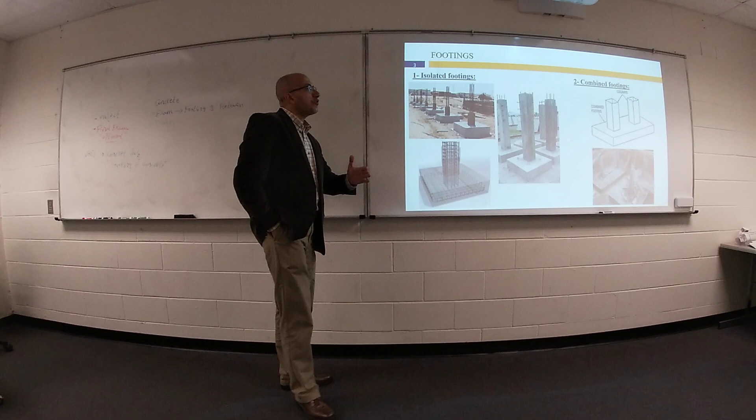We have different shapes of foundation. Maybe every column has a footing, so we can call it isolated footing. Your reinforcement is just mesh in 2 dimensions, X and Y, just one layer of reinforcement. So the first type of your foundation is called isolated footing. Each column has its own footing.

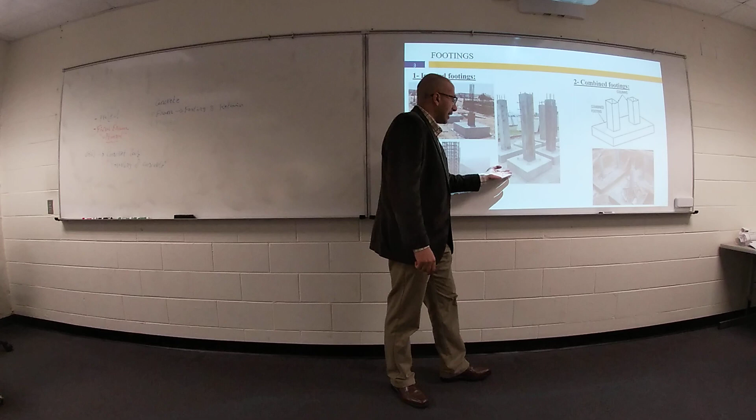As you see here, this footing, we need to know a few things. What is the dimension of your footing? Looks like a rectangular shape. What is the total depth of your footing? How much is the reinforcement at the bottom in this direction and this direction? If you would like to design your isolated footing, I need answers for all these questions: width and length, total thickness, and how much reinforcement at the bottom in both directions.

One student will ask me, what about your column? We did our design of column already. Just a quick hint: in the concrete exam, at the beginning, do you remember what announcement I made? I told you there is no torsion in the exam. That happened? Yeah, I have many answers about torsion.

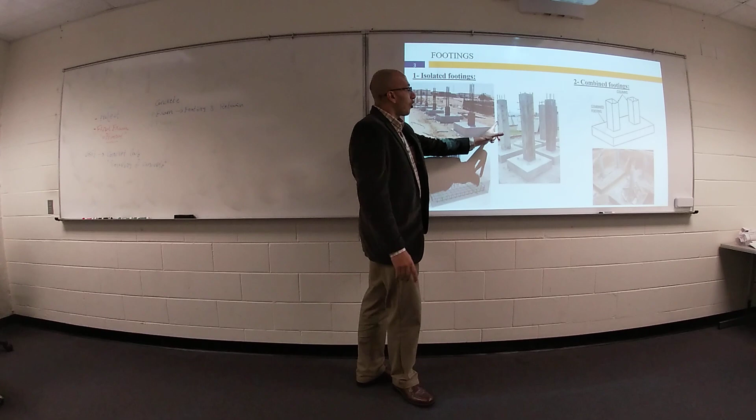So when we start to design isolated footing, we will answer all of these questions. Okay, I have 2 columns in your building, and I design isolated footing for this one and isolated footing for the other one, and I found something not good. This column and the other column, I'm talking about plan view. So this footing for this column, and the other footing for the other column, we have overlap between the two footings.

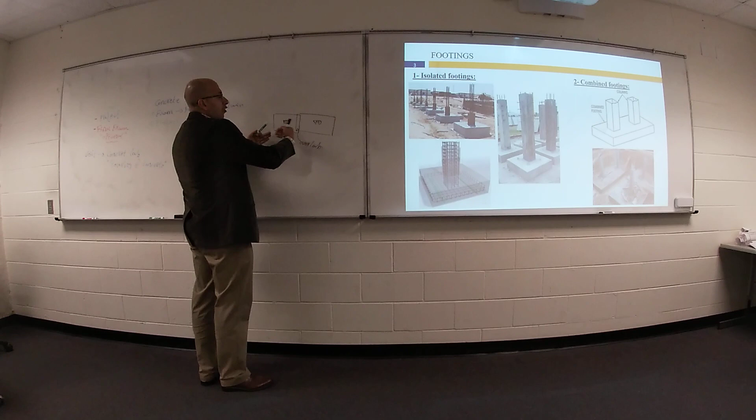So the other option, or second option, is something called combined footing. These 2 columns are very close to each other. For some reason, I placed 2 columns very close to each other. I designed first an isolated footing for this one and an isolated footing for this one. I found your footings overlapped. So I will cancel my first option and start to design something called combined footing.

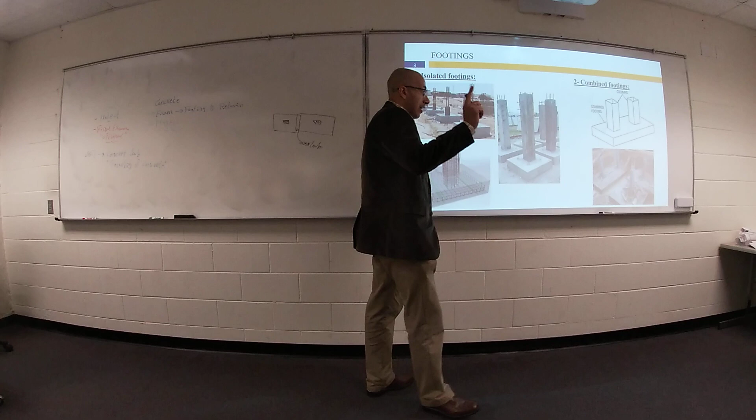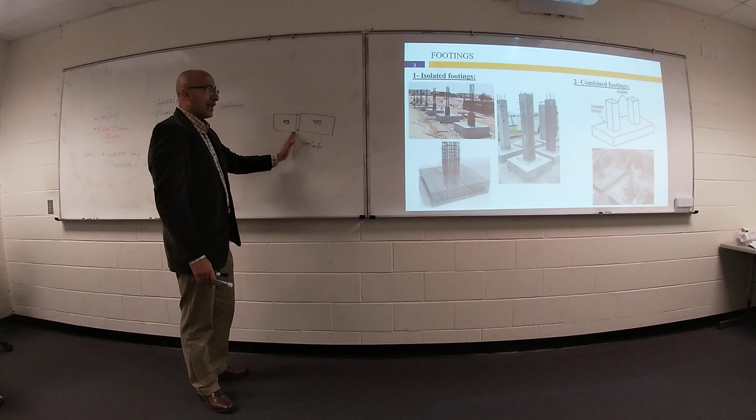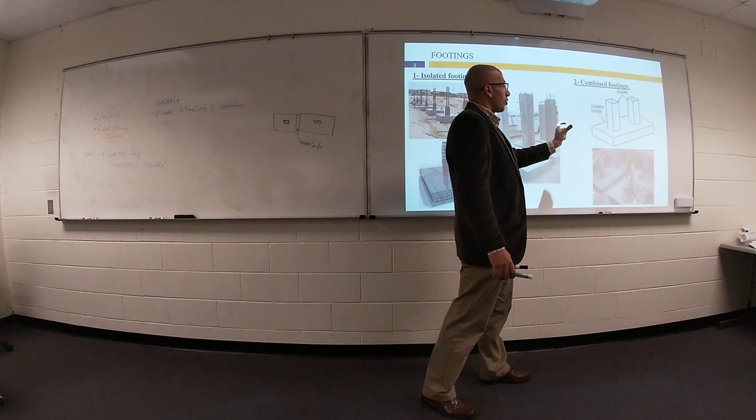Combined footing looks something like this. Only one footing supporting your 2 columns. So we have 2 columns supported by this footing. But remember, I cannot decide to use combined footing until you try isolated footing first for each column. If you have overlap in between, then I decide to use combined footing. Any questions so far? This one is more complicated because you have to try isolated first and then take a decision for combined.

Third type of footing is called strip footing. If you have a wall, and only one concentrated load or one column, yes, I can construct one footing like this. But if you have a continuous wall, I cannot construct only one footing, another footing, another footing - no, your footing will be a strip footing, something like this. If you have a concrete wall, a brick wall, any type of wall, fence, you can construct strip footing underneath your wall.

The fourth type of footing is called strap footing. But I forgot something. If you have an isolated footing, here is your elevation, and here is your plan. You have to put something in your mind: the centroid of your column - I will not say must, but should be - the centroid of the footing. So the centroid of your column will be the same as the centroid of the footing.

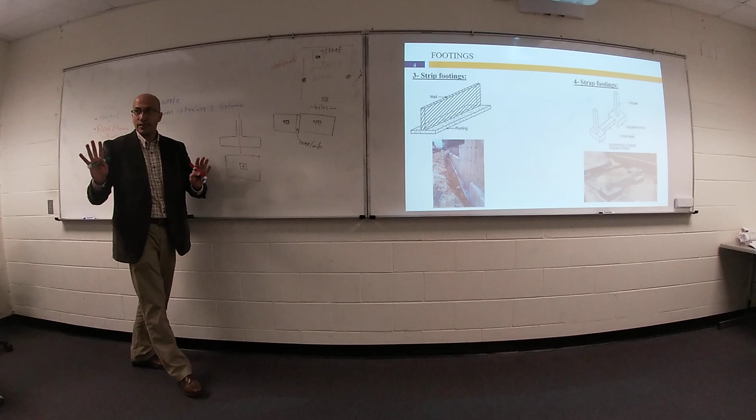But I cannot put anything at my neighbor's property. So how can I put my footing here? The only option is to put your footing like this. I cannot put anything over the ground or underground at my neighbor's property. That's right? What do you think? What is the difference?

Okay, let's see the elevation for this shape. You have your column and you have your footing, something like this. Your column has a concentrated load P ultimate. Do you think this load will make something happen to this footing? What do you expect? Overturning. Like this chair - if you stand at the centroid of this chair, nothing will happen. But if you stand at the edge, overturning.

We have another column inside your boundary with regular footing. So I will connect between this footing and this footing with a beam. This beam is called strap.

So I will connect this footing with another footing and another column inside your property. If this column would like to overturn this footing, this strap will connect between this one and this one. This is the idea for strap footing.

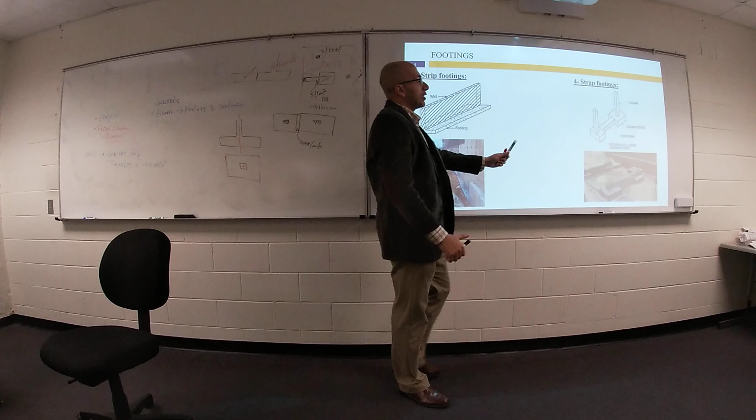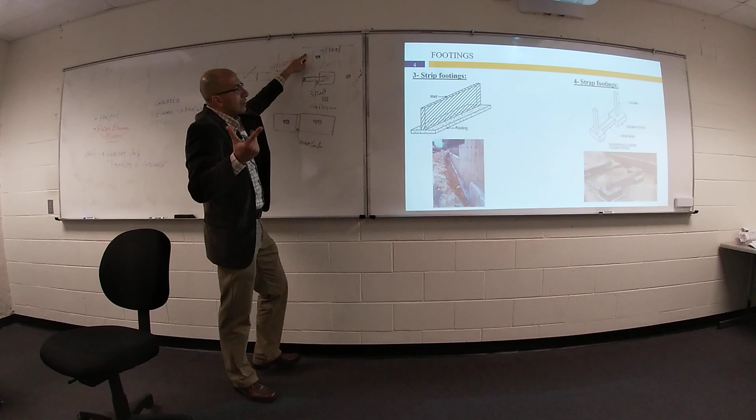Like this, for some reason, maybe this one will be also on the street. Maybe you don't have a choice to put your footing in the street, no way, so I will put my footing at the edge, like this. So I have to connect between this footing and another footing with something called a strap.

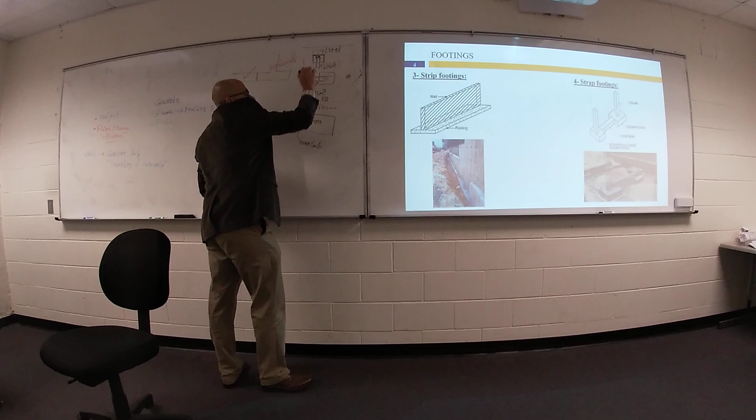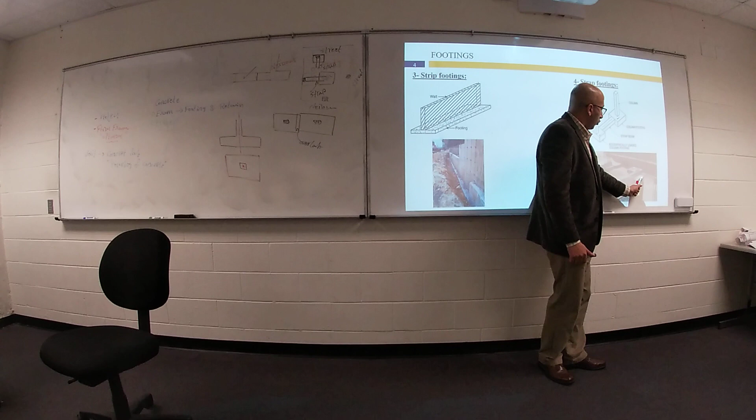So if you don't have the option to put your column at the centroid of the footing, and you have to put your column at the edge of your footing, we have to connect this footing and this footing by something called a strap. So this is the shape of your strap. This column, this footing, the column at the centroid. But this footing, your column at the edge of the footing, so we connect between this footing and this footing by strap.

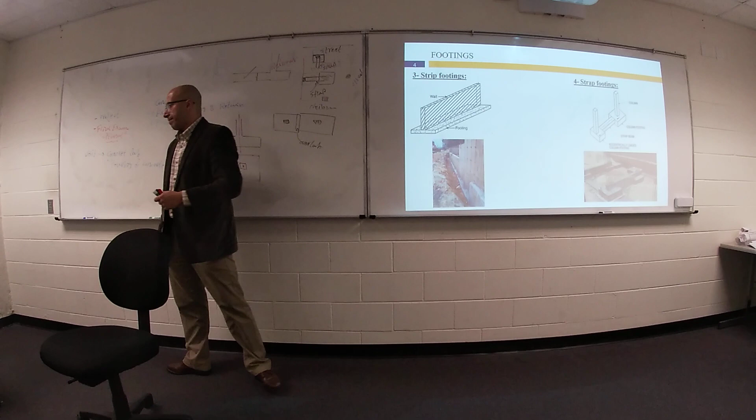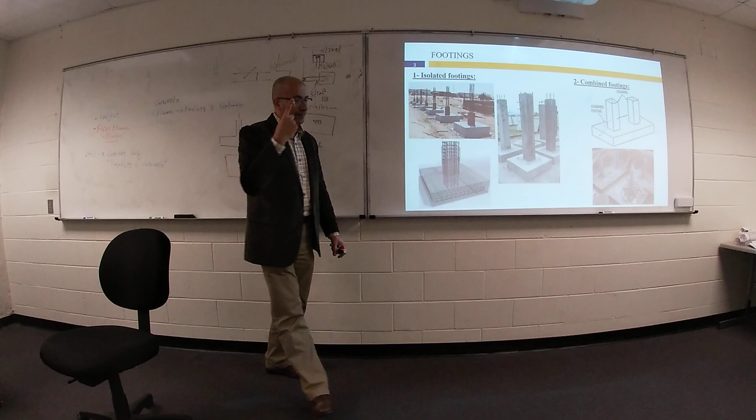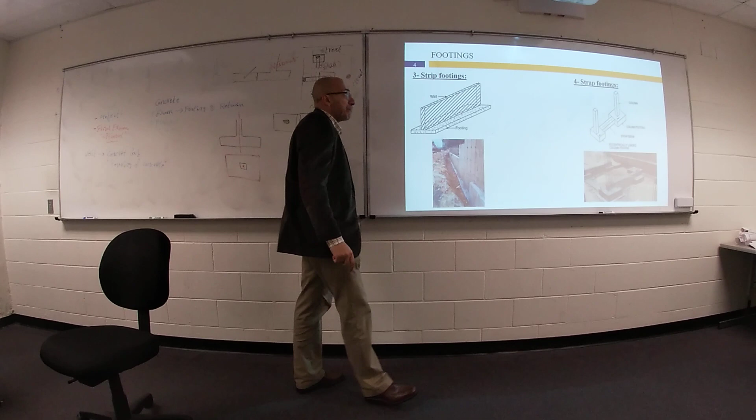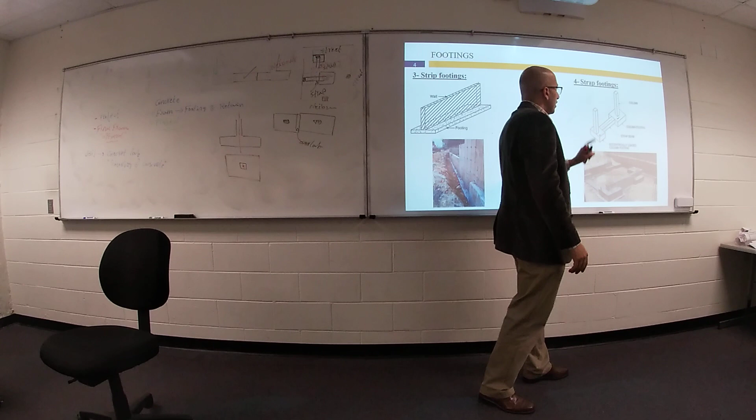So do you remember we have 4 types of footing? First, isolated - each column has its own footing. Second type, combined footing - 2 columns in 1 footing. Third type, called strip footing - if you have a wall, a longitudinal wall continuous with you, so we have to put a strip footing. Sometimes we have strap footing if your column is at the edge of the footing for some reason - we cannot put this column at the centroid, so your column must be connected by strap. Any question so far?

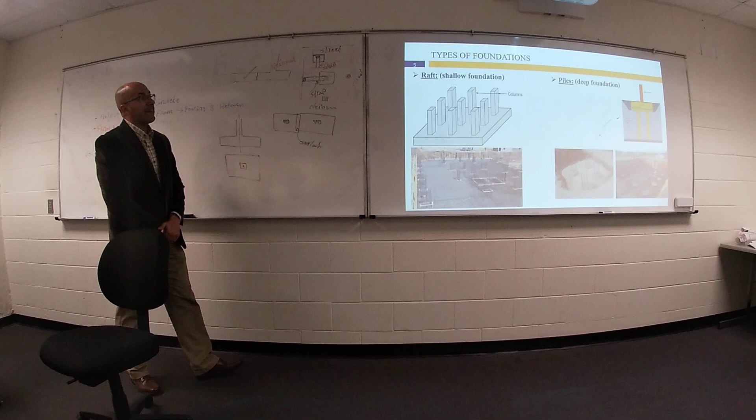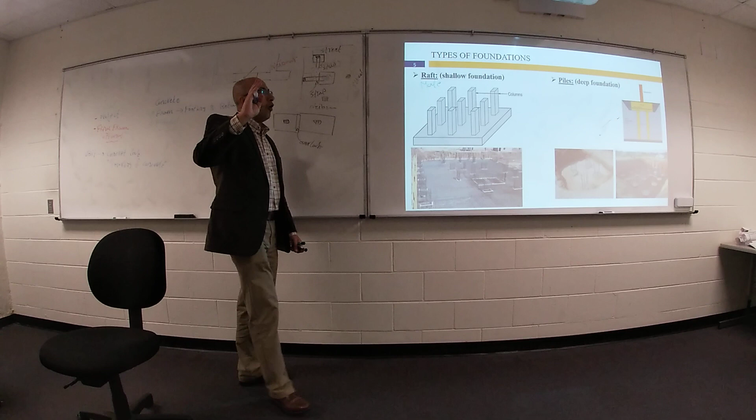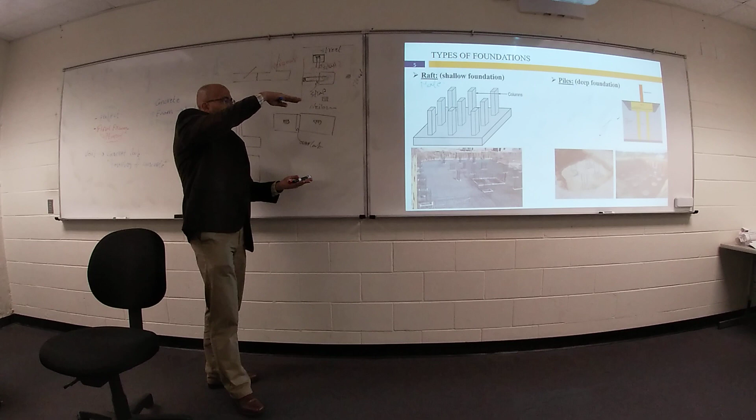We have another type of foundation called raft or mat. Raft or mat can be written like this, mat foundation. All of your columns in your building supported by one big footing, but at this time we can't call it footing, we can call it raft or mat. Something like this - the whole building, the whole columns in your building will be constructed on one raft. Your raft looks like a slab with double layers of steel reinforcement, but your depth is very large, not 4 inch or 5 inch.

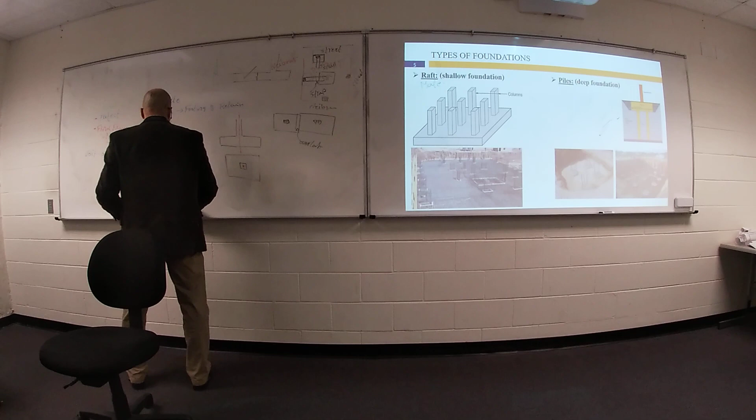No, it can reach maybe 20 inch, 30 inch, 40 inch, based on how many floors you have. So, raft foundation - only one slab, but we can't call it slab, we call it raft or mat, supporting all of your columns in the building. The steel reinforcement, double layers, top and bottom steel reinforcement layer in each direction, to reinforce this slab.

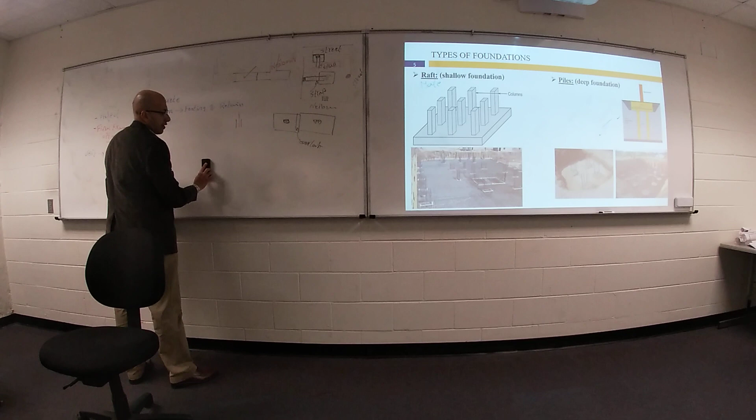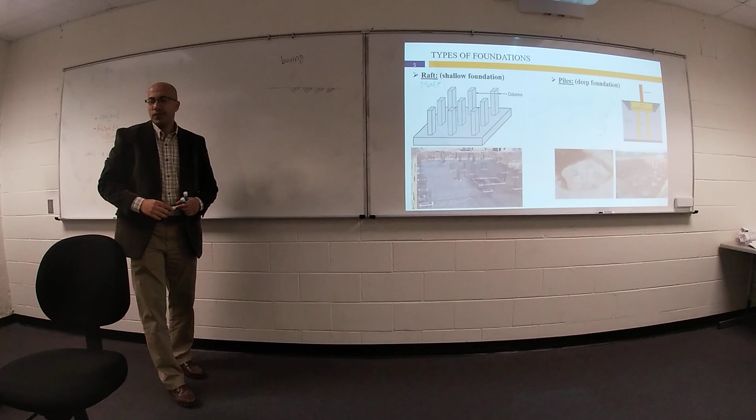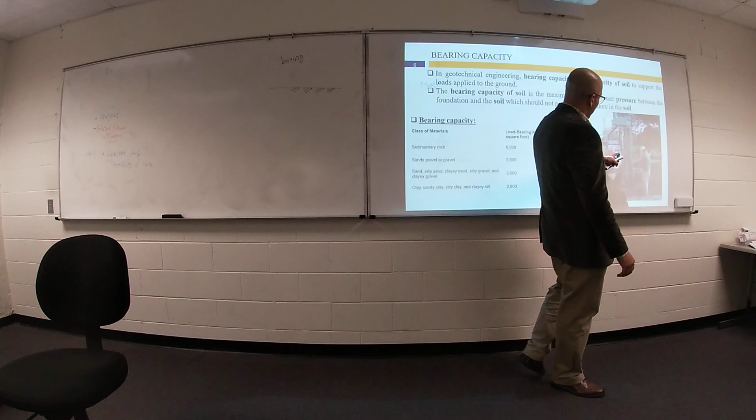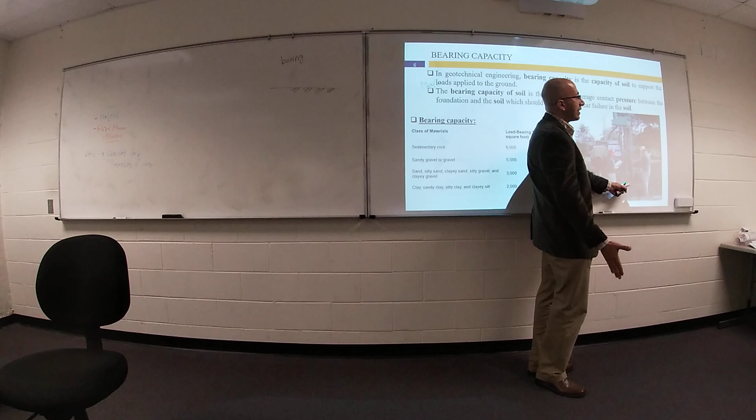The last type of foundation is called piles. Did you hear about piles before? Yeah, piles - we have a big issue. What's the issue? Here is your ground surface. Do you know something called boring? Boring, no? Okay, you will hear all of this stuff next semester with Dr. O in soil mechanics. Boring - we have some people coming with this excavator trying to reach a certain depth in your ground to take samples of soil. Maybe you can reach 10 feet, 20 feet, 30 feet, 50 feet, 100 feet, based on what type of foundation or what type of building.

So I can tell you, hey, the first maybe 10 feet of your soil consists of clay. Then we have another 20 feet of what's called sand. Then we have another 25 feet of gravel. Then we have rock.

And we need to construct a building for 100 floors. So for 100 floors, we need to reach what's going on inside the soil. If you construct your 100 floor building on clay, failure will happen to your soil. Sand, the same. Gravel, the same. The only layer that can support this heavy load from 100 floors is your rock.

But it doesn't make any sense for me to excavate around 55 feet for the total area of your building. So we have another option: we can construct columns, but at this time these columns are embedded in your soil. So we can't call it a column, we call it piles.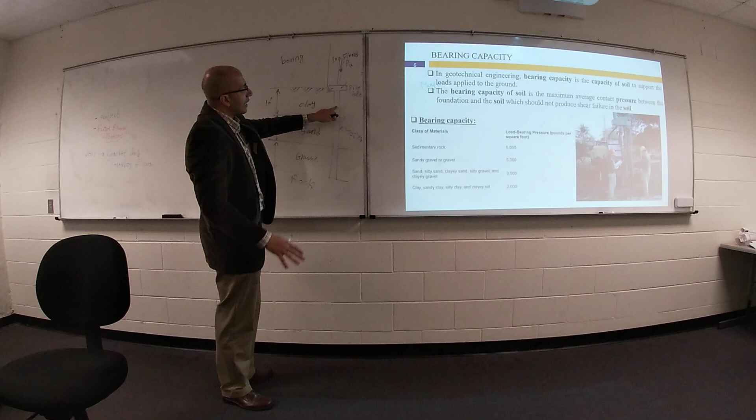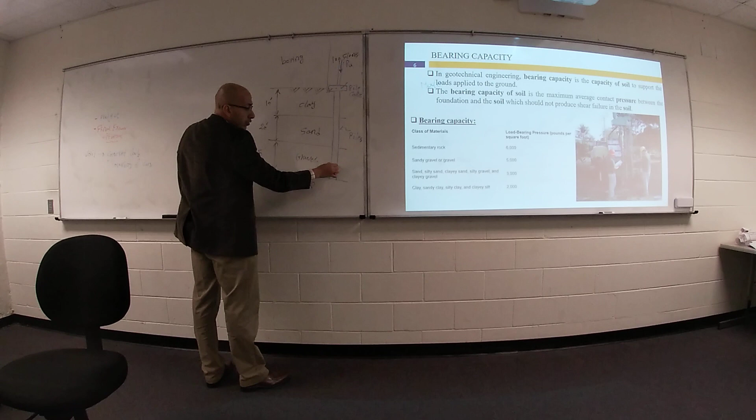What is the main purpose of this pile? Here you can construct your footing, and your footing supports your column. So the load coming from the column is supported by this footing, which is called a pile cap. I can't call it footing because footing should be supported by soil directly, but this one is supported by piles, so we call it a pile cap. Then the load goes from the pile cap to the piles, and the pile transfers your load to the soil layer that can support this huge amount of load.

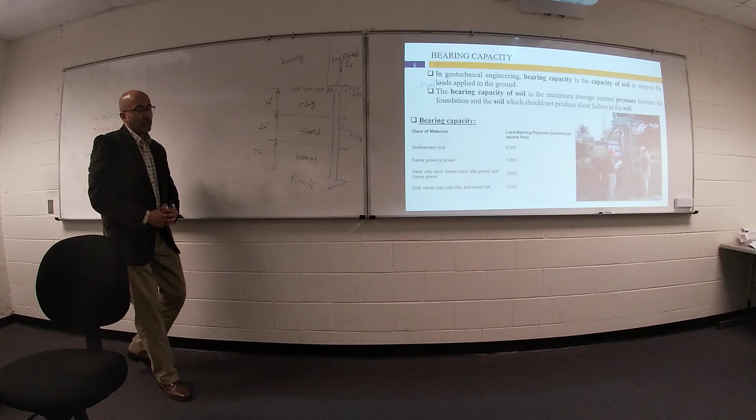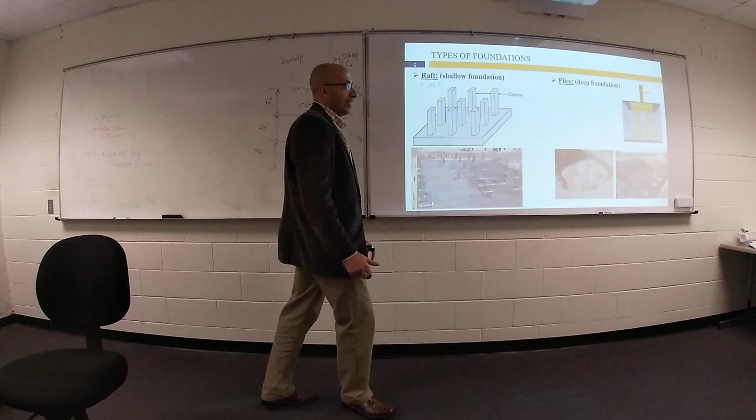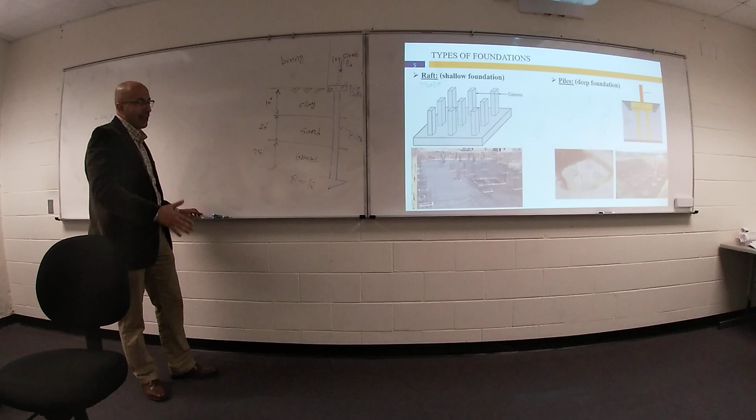You got it? This type of foundation is called deep foundation - deep, because we need to reach something very deep inside your soil. Here is the shape of your piles - I cannot see it because it's embedded in your soil. How can we construct these piles? We have many techniques to construct these piles, but this is not our topic in this course.

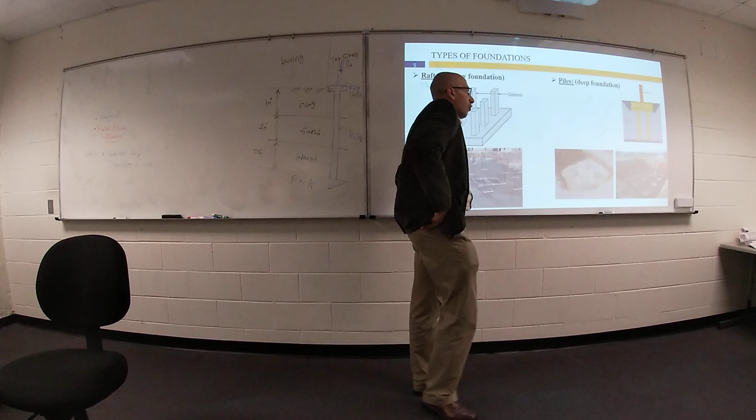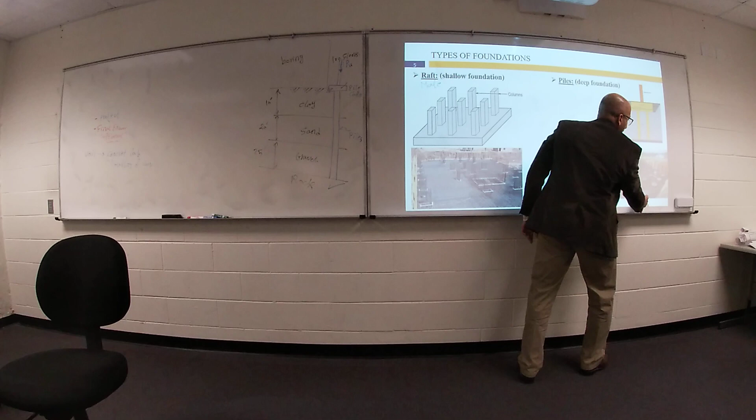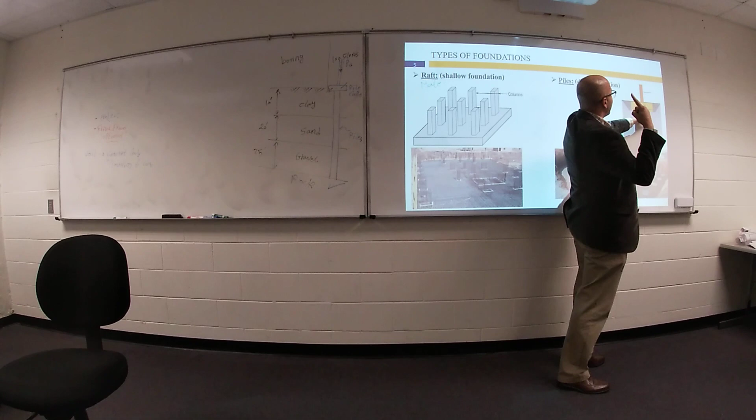So we construct an embedded column, then your column will support something called a pile cap, and your pile cap will support your superstructure or columns after that. We have two shapes: maybe we have a raft supporting the whole columns, and this raft is supported by many piles embedded in your soil. Or we have each column with one pile cap, and this pile cap supported by a few piles. We have another pile cap there, another pile cap there, another pile cap there.